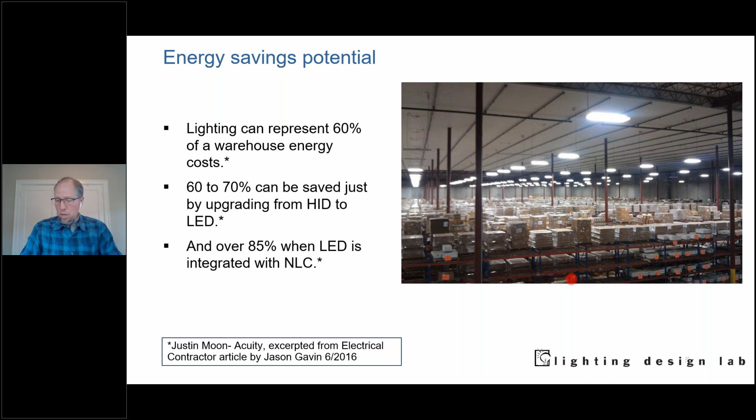So what we'll try to accomplish today is understanding common lighting control strategies. We're not going to spend a lot of time on that. This class is building on some classes that Sean and I think Armando have done on controls. But we're going to review some of the fundamentals of network lighting controls and then review how controls relate to current lighting health and light and health research, touch on that, and then review some applications and look at some products in specific products.

So, you know, people think of warehouses and they think of just big aisles of racking, high racking, or even just low racking, but it's just big storage. And certainly that's a part of it, but warehouses are complex facilities, just like many other facilities. And each of these areas can benefit by controls and can benefit from a tailored lighting approach. So you've got shipping and receiving, certainly the storage, whether it be aisle storage or open storage - those would be handled slightly differently. Loading docks, you've got maintenance areas. Then there's offices - most warehouses have some kind of office. Sometimes they're rather large, sometimes the corporate headquarters is located at one of the major warehouses. Then you've got obviously utility areas like restrooms and showers, and then perhaps customer areas where maybe people come in and are going into boardrooms, meeting rooms, or even just lobbies and talking directly to the staff. So again, complex facilities.

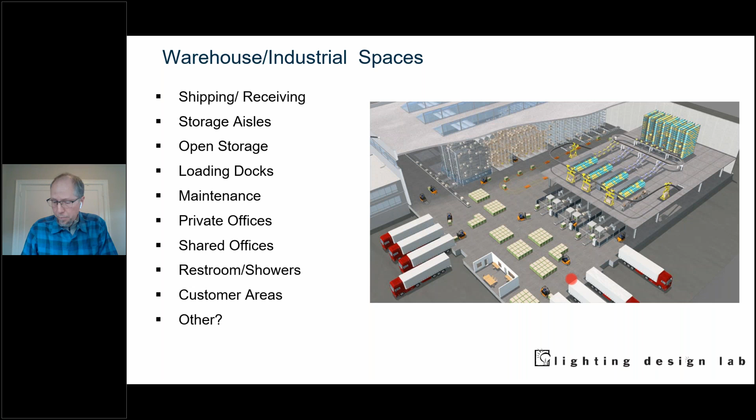This is a controls class, but I think we're going to do a brief overview of some of the high points of what modern warehouse lighting might look like, just to touch on a few things.

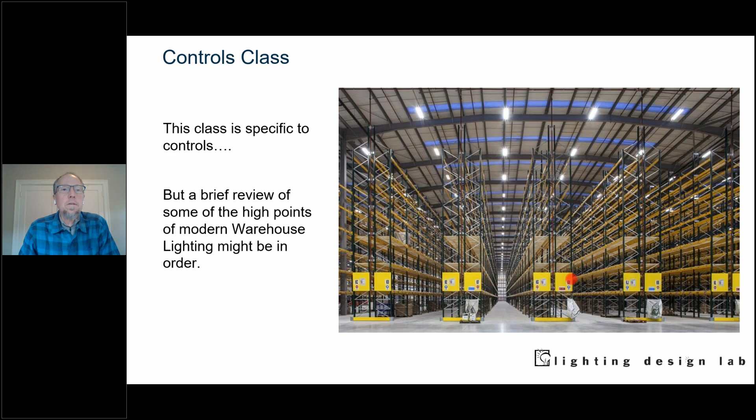Obviously, almost all new construction today lighting is being done with LED. I can think of maybe just a few niche areas where you might use something else, but for the most part, it's LED all the time.

And that's a good thing, especially new LEDs. Modern LEDs are extremely flexible. They really save on maintenance due to their long life. You can do things with LEDs and color that weren't possible before. Of course, they can be a white light source, an excellent white light source, and they're not all the same. We'll look at this a little later.

They can have somewhat poor to excellent color rendering, and you probably don't need the highest quality, highest color rendering for most warehouses, but you also don't want poor color rendering because speed and accuracy are critical to good operation.

LEDs, how they've impacted architecture has been rather profound. The fixtures are smaller and lighter weight. I don't know how many of you have actually picked up an old style high bay metal halide fixture, but they're very heavy. That's not a huge factor, but it does factor into building design and some other things.

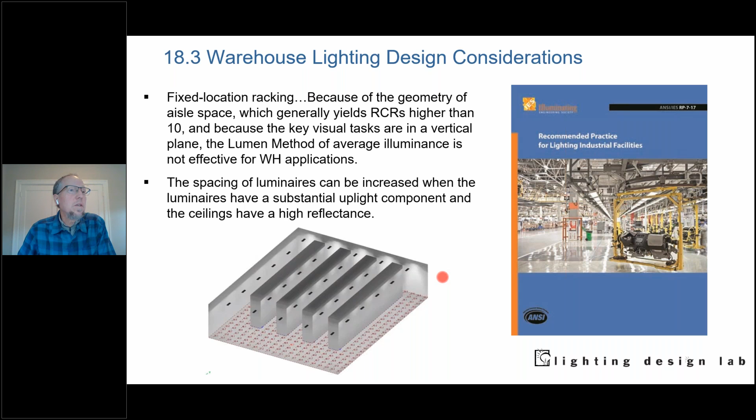You know, how much light do you need? The IES, again, from the IES handbook, they have average maintained foot candles, and they have a range for different things. I just excerpted bulky items, things that related to a warehouse, cold storage, aisles, etc.

This is actually from our website, Lighting Design Lab. We have a little foot candle guide that you might find useful - you can find that in our resources section. But at any rate, so we have the horizontal foot candles, but they also have vertical.

Vertical lighting is critical, particularly in racking areas. That's for reading labels on a vertical surface, like the end of a box or the end of racking. It's particularly important, and not so much horizontal.

So they have ranges and targets, lighting targets for that. These are in foot candles, by the way. So that might be one way to determine how much light you need.

Another, of course, is there's going to be state and local codes that might come into play as far as minimums required.

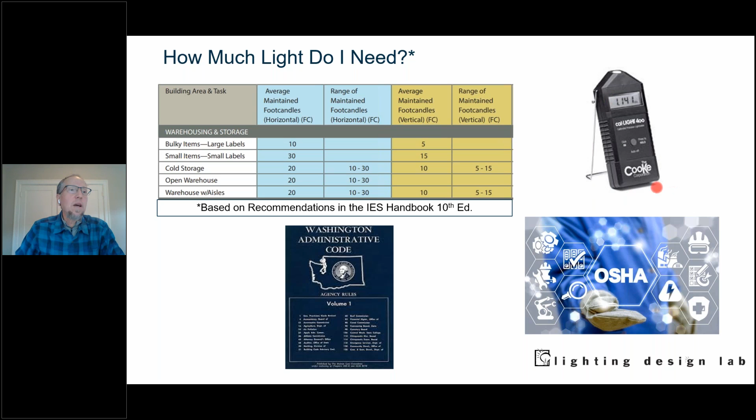Another thing that might be relevant is often an owner will say, well, I know it's a minimum of, say, 20 foot candles, but I want 40. Now that could be a discussion you have. Or they may say, we really like our existing lighting, so when we do this redesign or retrofit of our big facility, we want it to be the same amount of light. So you need to go in there and see how much they've got. It may be low or high, but at least that gives you some reference point for how much they need, or at least want. So having a light meter would be relevant there.

How much light you will get, of course, is a calculation. So you have an idea of what they want or what's required, and how do you get there.

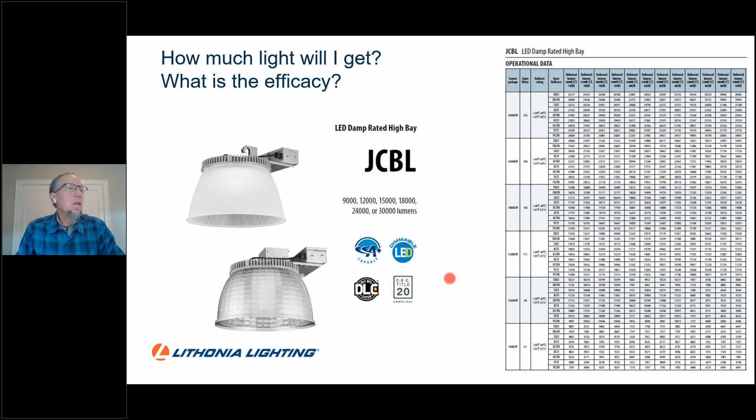Here's a product, a high bay fixture by Lithonia. This one product has many, many variations. So which one do you choose, and how do you know what to pick? I thought it was interesting — you need to be a little careful.

If we were to pick this 30,000 lumen fixture, and go to a 4,000 Kelvin, a fairly neutral, cool color, 70 CRI, we get close to that 30,000 lumens — 29,500 or so.

And the efficacy changes. The 40/70 CRI version is 125 lumens per watt. The 90 CRI product is 80 lumens per watt.

Now, it's possible you need that higher color rendering — maybe you're on some high-speed production line where you're picking things quickly, maybe pharmaceuticals or electronic components, where a mistake is a real, life-threatening problem. In that case, you just have to go with the higher color rendering, knowing your energy savings won't be quite what they could be. That's just the cost of doing business, if you will.

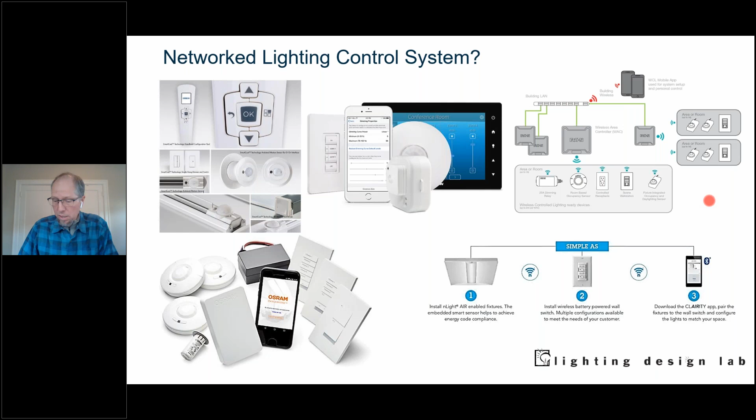Network lighting control systems - it's not just one size fits all. There's so many different possibilities out there, it can be a little overwhelming. One thing we're going to try and do in this class is explain a little bit about some of the systems, but also set your mind at ease to show that there's a lot of commonality between them, but you can choose the one that works best for your situation. We've got some that are fairly simple, some that are much more complex. Generally with the complexity adds more possibilities, more variations. So you just have to decide where you need to be.

Most of these network lighting control systems are going to be a distributed system. That means they're going to have controls in one area, user interfaces, and sensors going into those same zones. So we have Z1 here, we have a user controller at Z1. Those are all going to be connected, whether it be a sensor or a manual user input. They can be a standalone system, or they can be integrated with other types of building systems.

We'll find all of these, even the simplest ones, will be scalable to some degree. They can incorporate some kind of scheduling - time scheduling, date scheduling - though if that's important, you might want to be sure you get one that has more ability there. Again, we'll accept input from various devices and sensors. All are very flexible, and if you want to incorporate it into other building systems, that's something you need to be sure you can do in advance. Most of them will, but there may be workarounds you need to be aware of.

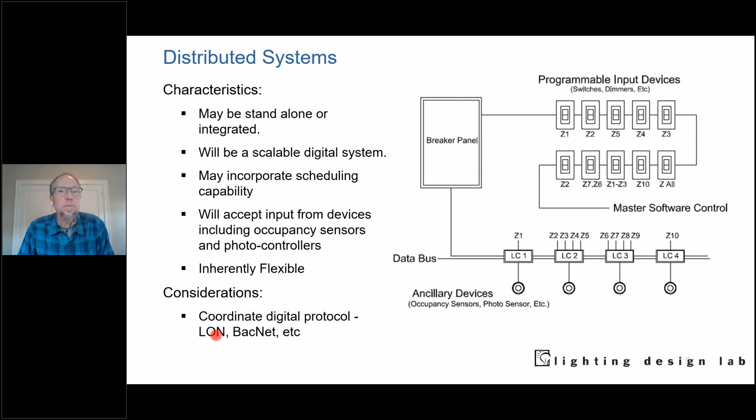Then we see luminaire level lighting controls. So here, if we go back, this is a system where you're putting in components, usually from one manufacturer, but not always. Here, everything's baked right into the fixture for the most part. Then the various input devices, other than the sensors built into the fixtures, there might be wall controllers - those would be part of the same manufacturer's product - and then you're setting it up with usually some kind of handheld device.

They're simple to install and specify - that's one of their big selling factors, if you will. You can get highly granular zoning - we'll talk about zoning a little later on - but in a sense, each fixture is its own zone. Usually capable of occupancy and daylight sensing. Smarter systems, if you will, can do more things - they can have other sensors, maybe CO2 sensors, or other types of things that would be inputs.

We'll look at those. Pretty much all of these will require some level of commissioning. One of the promises of the luminaire level lighting controls is that out of the box you can just kind of put them up, and once you turn it on and set it up, it's ready to go. But to maximize your savings, you're going to want to probably tailor it to some extent.

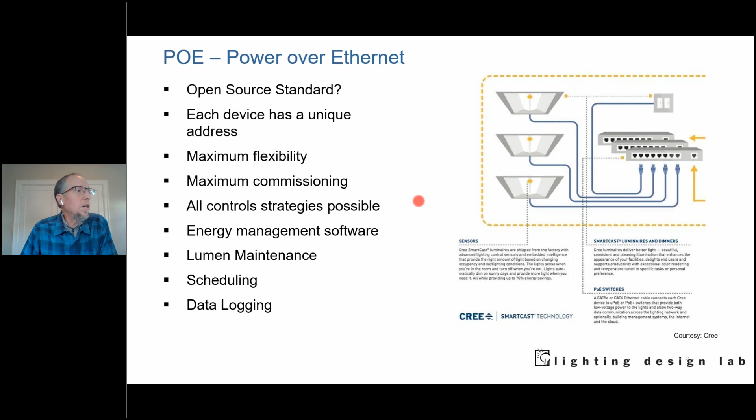So the systems out there today, just to recap and touch on them, are going to be distributed. Wireless is one thing that we're seeing more and more. I think there's often going to be some wired components there, and certainly most of these products can do a fully wired approach if that is what you either need or want.

More complex, more capable, less complicated. So the complexity increases, but often the simplicity is also increasing. Costs are coming way down, and that's been a roadblock over the years. Easier to install and commission, and in general, they're just getting better. So it's really worth taking a look.

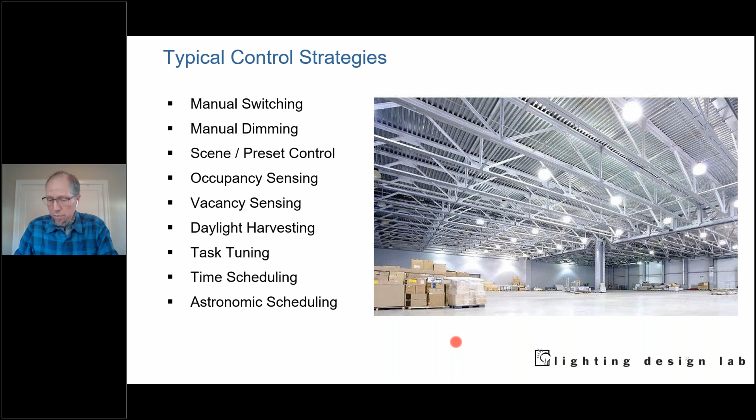So typical control strategies, and some of these are not much of a strategy. One is manual switching, and honestly, in a warehouse, that may be one that you'll still see, where you're coming into a space and you just want to actuate the controls manually. Manual dimming, again possibly, and certainly some of these would apply in office areas, as we'll see. There's a whole range of spaces. Scene and preset control, again probably not quite as important for a warehouse environment. Occupancy sensing, definitely. Vacancy sensing, definitely. Daylight harvesting for sure. Task tuning, we'll touch on that for sure. Time scheduling and astronomical scheduling. Yeah, all of these are relevant. Let's go through some of them briefly, some more briefly than others.

So yeah, line voltage switch, manual switching rather - the oldest types are line voltage, but we see, especially in big facilities, you might be running low voltage actuators to some of the exits and egress points, and then they just turn on big banks of lights. That would be more of an old school approach.

Zones or groups - we may be having areas that are in a zone, small zones. Shipping and receiving would be two different zones, but you might group shipping and receiving into one grouping for certain kinds of things. It's just a range, simple to design, easy to understand, and may not meet codes. We're seeing less and less allowance for manual controls, at least as the main control device.

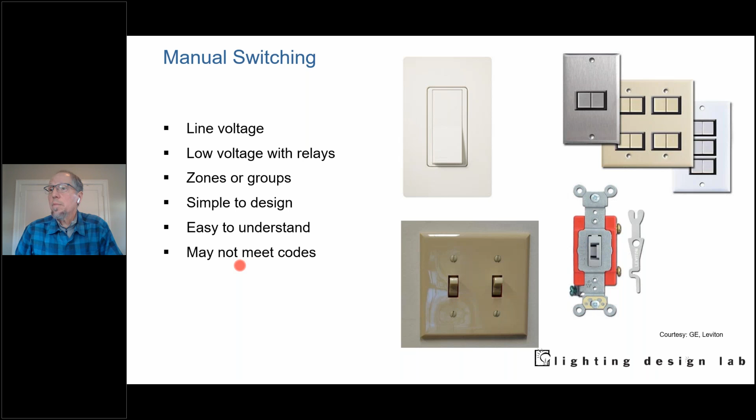Manual dimming certainly has its place in certain types of facilities, maybe a little bit less in a warehouse. The dimming can be line voltage, where dimmers are controlled directly by line voltage, or more likely low voltage remote dimming, where you're controlling a large dimmer located in some other area.

Network systems, again, use zones and groups - simple design, easy to understand. Most people get dimmers, and users do like to have a certain degree of control, which can help for productivity.

Preset scenes are somewhat less seen, though that's not necessarily true. We think of presets and scenes as being something you'd have in a boardroom, but really what we're talking about is zones and groups of zones that all act together for various inputs. You could have a scene that goes from day shift to night shift, and it might be slightly different - maybe at certain times receiving is done but shipping isn't. Or maybe the office is closed, so you can shut off the lights to that section of the building. So some of those could be considered scenes - it's not without some use.

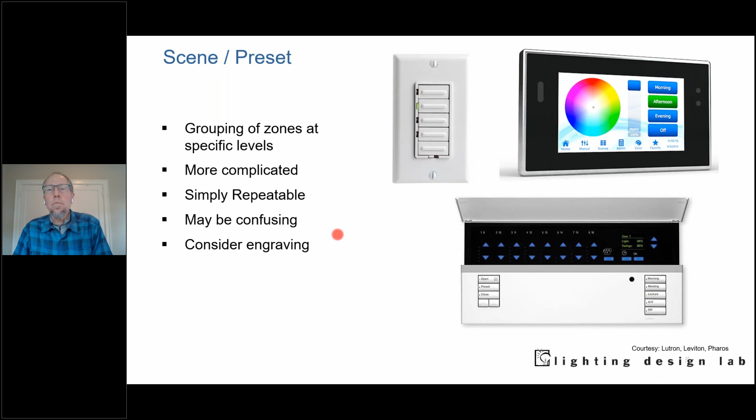All right, so I've included this little video that my colleague Sean put together, a very clever little video to talk about some of these things. I'm going to see if it's going to run for us here. Let's just try it - it worked in all my tests.

Here we go. So we have on-off controls, so we can have all the lights come on manually and then go off manually - that would be your basic switching.

Now we could have manual dimming, where we have one zone that goes even down, dim it back up again, turn it off again - so that would be manual dimming. We can do that with a single zone, or pull them all together as needed, and then of course turn them off. You'll note that all this is being done wirelessly.

Okay, so now we have preset scene control, and so we can dim down. One scene is all up, everything down. Another is certain lights go off, certain zones, and others stay on, and then we can of course turn everything off.

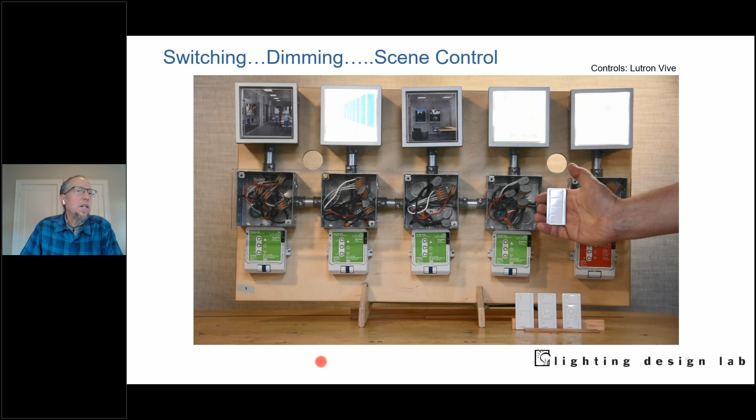This is one system, but other products have a similar effect.

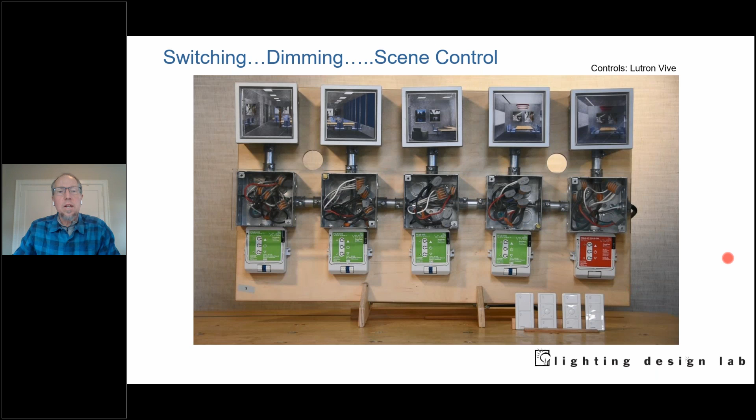I will say that Sean agreed to let me use this slide if I would mention that he's considering a sideline as a hand model, and so he'll be pursuing that later. Okay, that's not true.

So the sensing - some of the input devices. Obviously we've all heard about occupancy sensing, hopefully. That's where you walk into the space and the lights turn on, and then when you leave after a certain period of time - it could be 5 minutes, it could be 30 minutes depending on either what you want or what the code allows - the lights will automatically turn off again.

There may be a little bit of hesitancy for using some of these sensors. Some of the older ones maybe didn't work so well; the new ones are certainly much better. Often the occupancy sensors have been supplanted by the vacancy sensor - we'll touch on that in the next slide.

We would be seeing occupancy sensors primarily in public type spaces - corridors and stairwells, toilet rooms, warehouses, parking garages, and site lighting - places where you don't necessarily want, or it's not practical, to have people actuating the lights.

And I guess now's a good time to say that a vacancy sensor - let's just go to that page - a vacancy sensor looks identical, almost functions identically to an occupancy sensor, except it requires a manual on. So instead of walking into the space and having lights come on automatically, you have to actually turn them on.

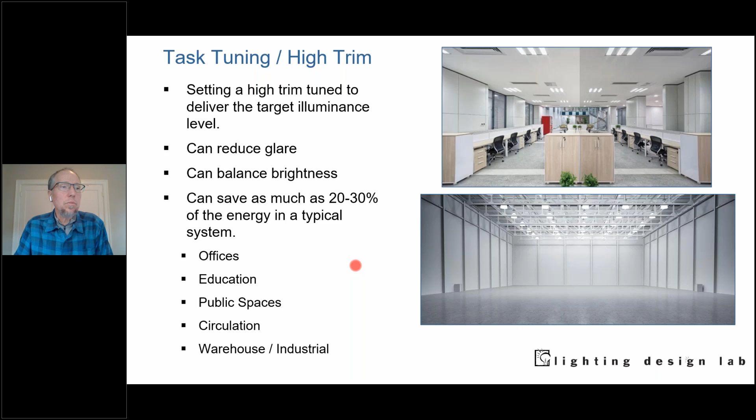Time scheduling—we know all about it—is where you schedule the lights so that, say, the business closes at 6 o'clock, and you want the lights to go off all the way or down considerably by 8 o'clock, or even 7, after most people are gone. Other times you can schedule for when you're closed on Sundays and want to make sure the lights don't come on except for a few safety lights.

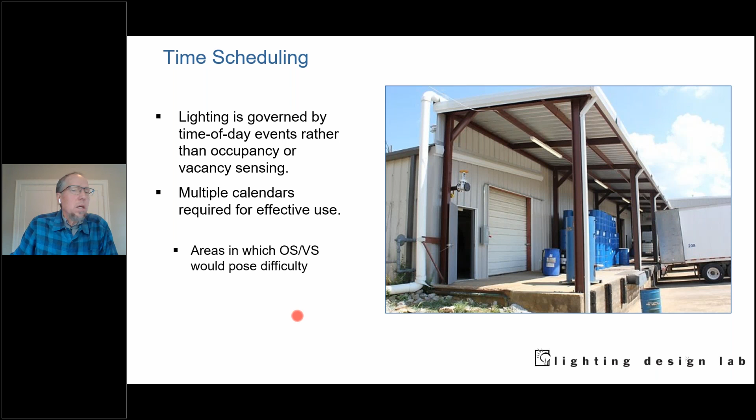Okay, so daylight harvesting, using photocells, using photo controls. A well daylit space is going to maximize your savings, and we'll touch on that a little bit.

There's been this trend, even in grocery stores and warehouses, places where you don't want to dim because it's been costly or not practical, so you just have the fixtures turn off, either in groups or all together.

One of the disadvantages: say your target light level is 30 foot-candles, and you program it so the lights go off when daylight is 2 times our target, 60 foot-candles. That means you'd have 30 foot-candles from the light plus 60 foot-candles of daylight, so you might be as high as 90 foot-candles, and then the lights shut off. Right there, you're going to lose 50% or 30% of your light.

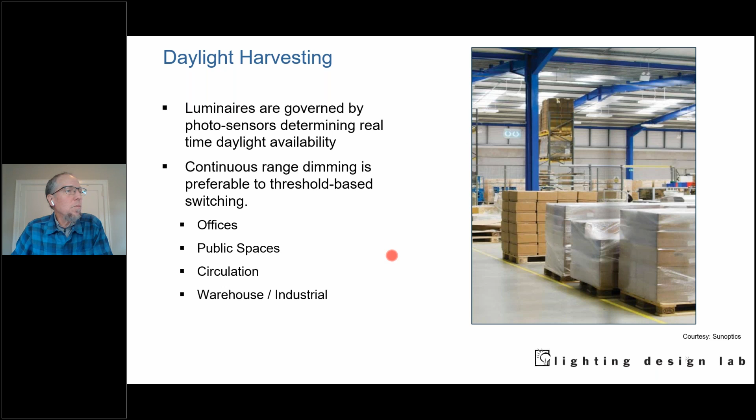Newer control strategies: tunable white, circadian lighting, we'll talk about those. Specific color tune adjustment, so you can either tune to a given color or play with your spectral power distribution. These are really two separate things, but they can affect mood and alertness, and before we had LED lighting, we weren't really able to do this from a practical standpoint.

Maybe after lunch it's even a little longer, places where you can manipulate it to change the mood, change the feel. Maybe different tasks are going on that make it appropriate to change the lighting, the light intensity, and the light color. LEDs are really able to do that.

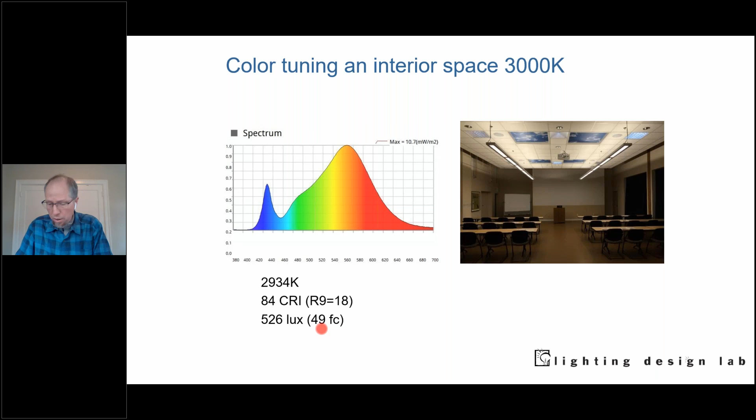But we actually had regular daylight. We had these Solatubes in there, so we could bring daylight into the space. Again, high, almost 100 CRI, color rendering index. It was, in this case, a little bit lower light level, about half the light level.

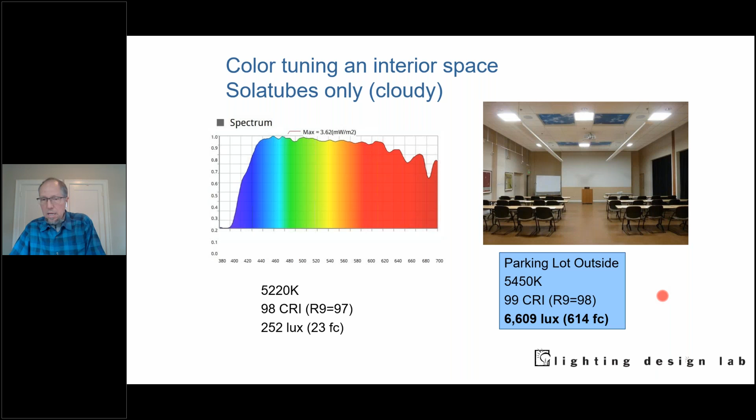And I think the jury's out as to whether we can really get electric lighting to take the place of that. We look at historic factory buildings, and this would be true for schools or even offices. They had tons of daylight, and the reason was because they had to. They didn't have electric light sources that were particularly effective.

I will say back then, in the winter, it was chilly in there, and in the summer it probably got pretty hot. So we really had a connection to the outdoors, for good or for ill.

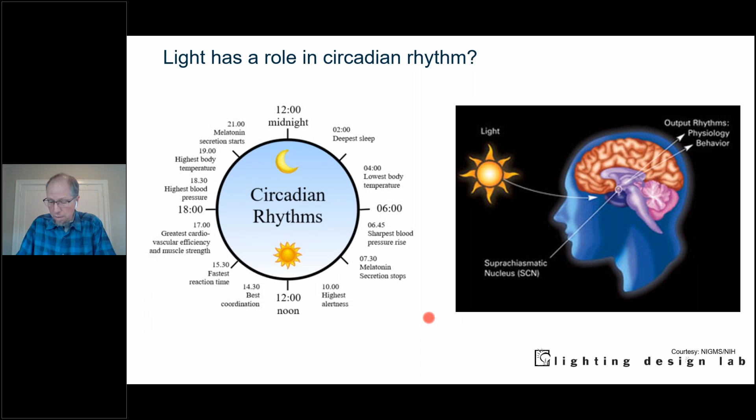Just recently, in this century, in 2002, we identified a new photoreceptor in the human body. It's like we found another finger or some bone hidden someplace that we didn't know about. And it's really not part of our visual system. So we've been doing research, and this photoreceptor doesn't play into our vision, but it does affect the messaging that's going on with our glandular systems and our brain functions. So we're learning about that as time progresses.

One thing we know about this new receptor, it's called the intrinsically photosensitive retinal ganglion cell, the ipRGC. That's a mouthful. It has a slow response, so it takes a little bit of time for it to affect things. It has to do with pupil size, and again, it can affect melatonin levels.

So some of these stimulus variables: we talked about time, we talked about intensity, distribution of the light, the spectral power distribution, and then the duration, as well as the timing.

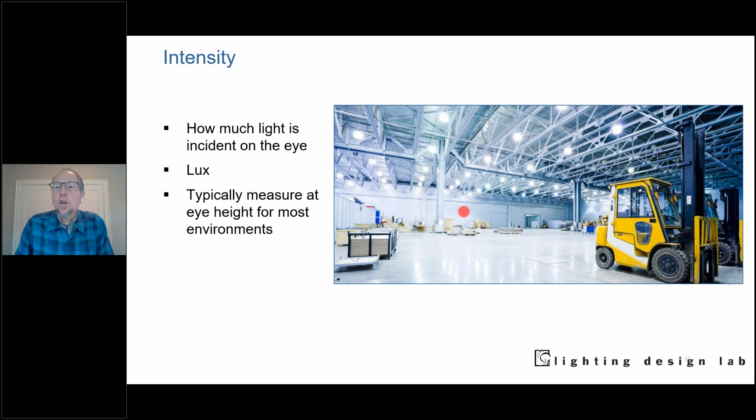The distribution - what direction is the light coming? Is it from overhead or is it from a lower angle? And that may be a function of the geometry of the space, where the fixtures are physically hung, and a whole range of things. Does the space that you're in have a lot of windows, let's say, or are they skylights? The distribution and the direction.

And then, of course, spectral power distribution. So we look at incandescent light sources, and we see lots of red dominant. We look at some of the LEDs, and we see a lot of blue. We look at some of our older, historic fluorescent sources, and we see gaps. We look at daylight, and none of these really look like daylight. So how big a difference does that make? We're really not sure. It may be very important.

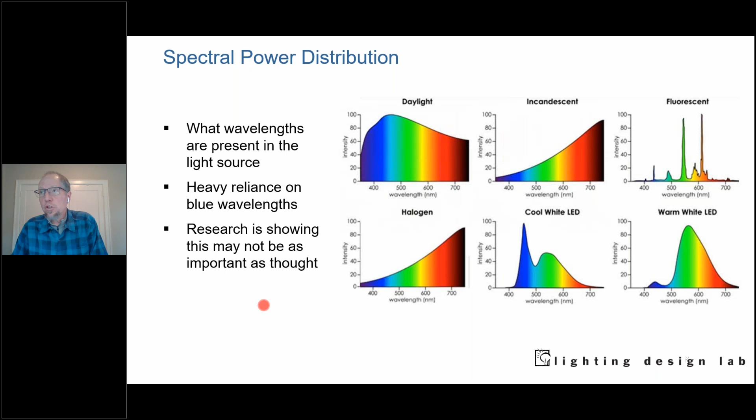There's some people who say lumens are lumens, so it's more about the intensity and the timing. Others are very concerned - is it red light, is it blue light? And then the dose and the duration. So you might be working in a space where it's mostly subdued lighting or some other kind of lighting, and you're only periodically going into the bright area, and then you're going elsewhere. So there's lots of factors here.

And lastly, we look at timing. So when are you subjected to these bright light levels that are maybe blue dominant? After work in the winter, you go to a big box store and you spend an hour there - well, maybe that's not a great plan. Maybe you should have done that during midday and then gone straight home after work. That's not always possible, obviously. So some of these get to be questions about how our society is structured.

Is it fair to have a night shift? In some cases that's not ideal. We're used to our Amazon Prime, where we're getting things within 24 hours. Well, okay, that means somebody's got to be working all night. We see this in healthcare. We're used to going shopping to Target at 9 o'clock at night. So again, we get into structural, societal changes, perhaps.

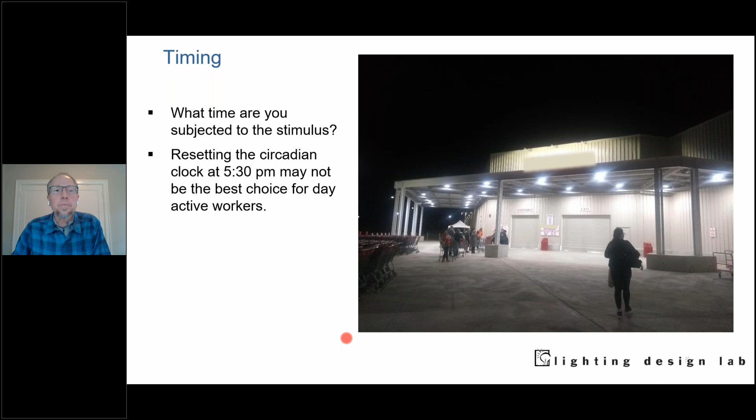So here we have it - the intensity, etc. If only we had a convenient way of manipulating most of these variables, like intensity, spectral power distribution, timing, duration - well, we can do all that with our advanced lighting control strategies. And with LEDs and controls, things are coming together about the same time.

Obviously, there's things that we do know. We're not completely in the dark here. Research is going on. There are things we know that we don't know, and I'm starting to sound like a politician here, but we don't always know what we don't know. So that's the biggest area, I think. Up until this century, we didn't know about the ipRGCs, right? So we're finding out new things.

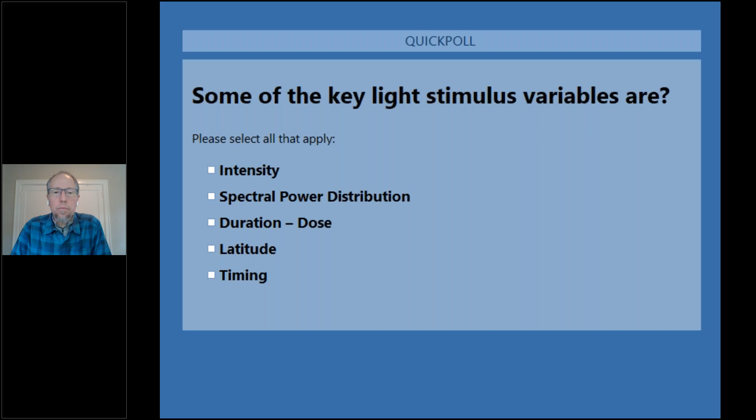I think probably people have had enough time to vote. It's been about a minute, so I'm going to close the poll and share it. There we go. Eric, on your right-hand side in your menu, is there an audience view tab or attendee view? On my control panel? Yeah, because I think you'll be able to see the results if you find that little tab. If not, I will just... yeah, I'm not gonna.

100% voted for intensity. Everybody remember that one. 92%, only 92% clicked spectral power distribution. What? 100% got duration and dose. 17% latitude. And 83% timing.

Well, everybody did good. Latitude was thrown in there just as an X factor, although I could see how you might think that might have to do with whether you're up in Iceland or down in Hawaii. So, right, the variables are... that was the little X factor there.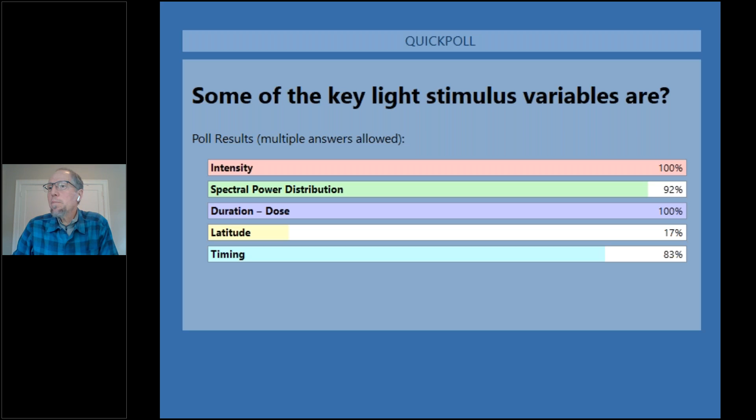I seem to have lost my pointer. I'm gonna try clicking it. Oh, there we go. All right. I'm going to also pick up the pace a little bit. I see we got a lot to cover and we're running out of time. See if I can advance things. Okay, not able to do that. Stand by. Put that over there.

Were you going to save David's question for end of class? Oh yeah, there was a question,

about how to anticipate what the savings will be if there's so many variables. I think probably the best thing you can do, if you have an existing building and you are putting in new lighting and or new controls, so it's a big old retrofit, is to do some data logging, get some data loggers and see what your occupancy rates are. These data loggers can log the amount of daylight coming in. If you have existing skylights, all of those things you can predict, to some degree. It's going to be a little bit of an unknown, but that's probably your best bet. If it's totally a new building, then you just have to go with what the norms are for occupancy, and we'll touch on that actually on one of the later slides. So that's a good question.

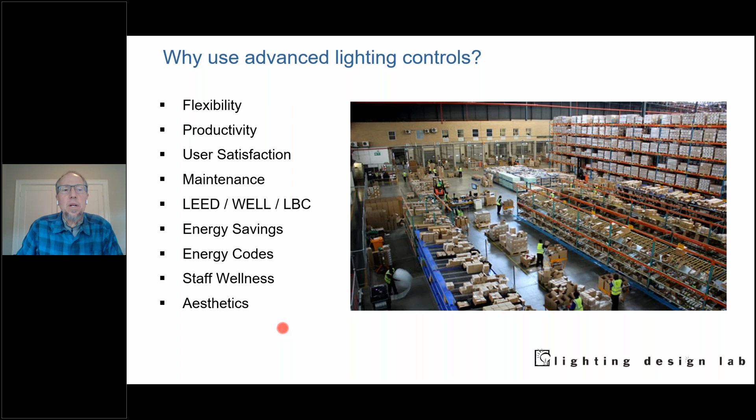All right, so let's look at some scenarios.

Typical warehouse, if we went with regular, last century controls, we would have photocells on the parking area, so the lights would come on at dusk and go off at dawn. We'd probably have one big switch or contactor where when the first guy came in the morning, they'd turn on the lights and they'd stay on all day, maybe until the end of second shift. In the office area, someone would walk in, turn the lights on, and they'd just stay on. Restrooms would probably have occupancy sensors, and the break room might have one too, although not necessarily. And that would be it.

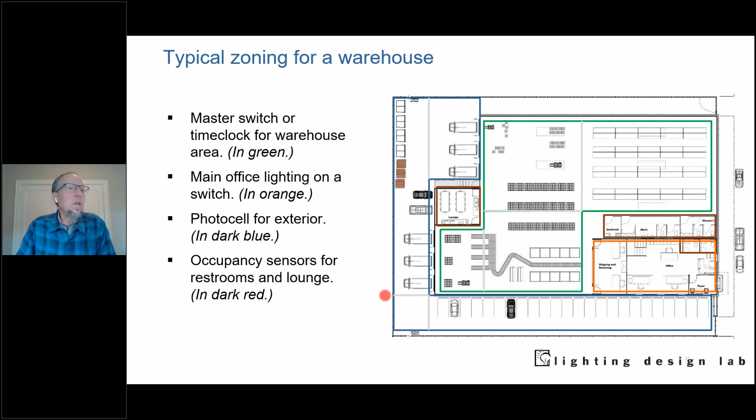Let's look at what we might have in this modern age. Now we've got photo controls in the parking, but we're going to zone them. We've got one zone for shipping, one zone for receiving and some staff parking, and another zone for staff and customer parking. And these would be photo controls.

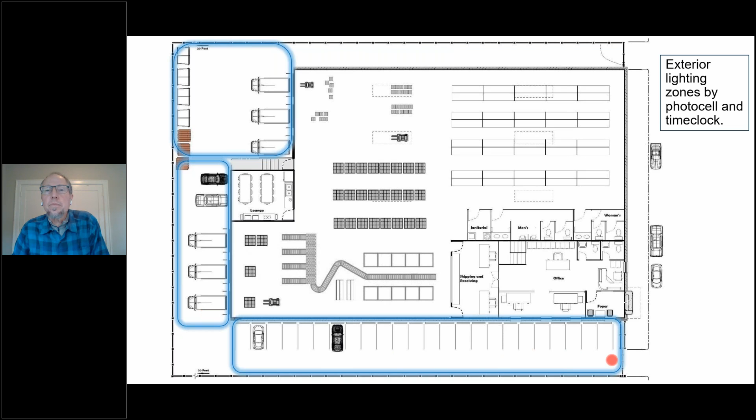Possibly a time clock too, in case. So with our modern approach, they'd be a photocell and a time clock. Then interior, we'd have a photocell in the break room—there are some windows here. Our receiving area would have a photocell, and the office would have a daylight zone going about halfway, a little over halfway, into it.

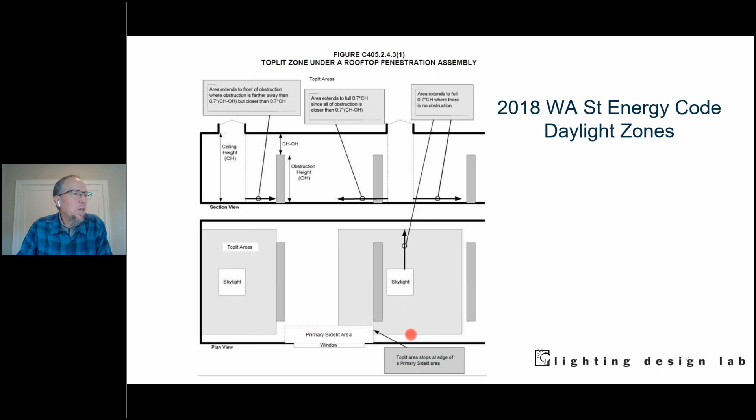But if we look closer, we see there are skylights in this building. In days past, we wouldn't care—they'd just be there, and as the day progressed the daylight would come in, but the regular lights would just stay on. We can't do that these days, and maybe we don't want to. For our skylights, Washington Energy Code says our daylight zone extends about 0.7 times the ceiling height out from the outer edge of the skylight. We'll assume the geometry of the space is such that this whole area becomes one big daylight zone with side lighting and top lighting.

So that's our daylight zone. Now let's look at occupancy zones. Before, all we had was occupancy sensors in the restroom areas and the break room. Now we've got a separate occupancy zone in shipping or receiving, this open area, and each aisle is its own occupancy zone. We've got the office here—shipping and receiving office is one, with some other functionality there—and the office is one occupancy separate from the foyer. Then we also have exterior occupancy zones: one at this little parking lot and one on the customer/employee parking.

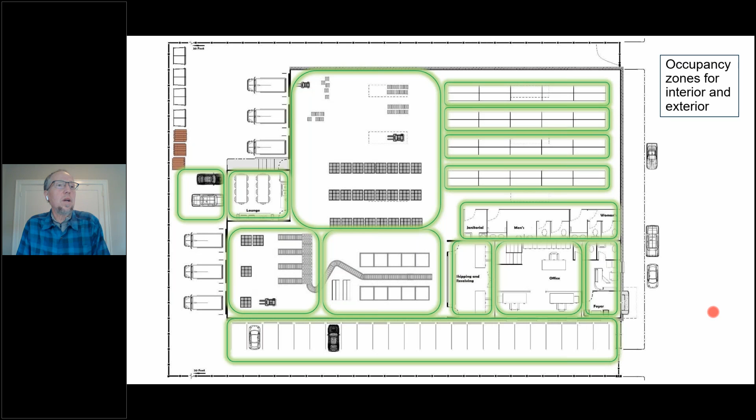A possible sequence of operation might be something like: a minimum of 10% during regular hours for the interior, unless daylight is 3 times the target. The aisles go to 85% upon occupancy for 3 fixtures around the activity—task tuning. The back aisle area goes to 50% upon any aisle activity to mitigate contrast. And egress fixtures go to 110% upon an egress event—whether power failure, fire, earthquake, or whatever—due to lack of contribution.

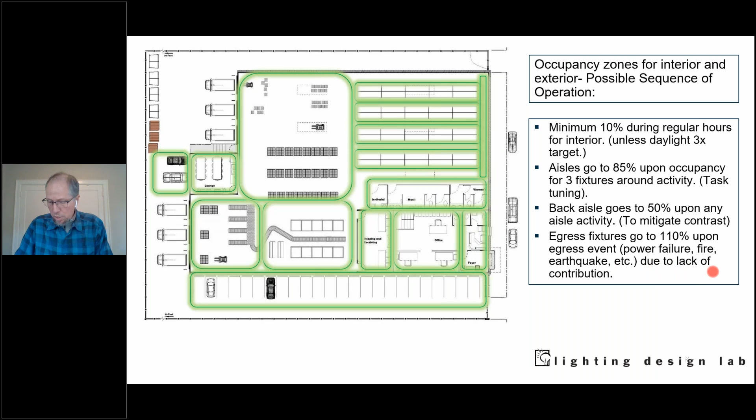What are the egress fixtures? Well, they might be something like this. So we've got egress lighting controls, maybe a little bit in each of the aisles. We want people to linger in the aisles, but not be in the dark, so they can find their way to the exits. Combine all that and it makes for a very complicated and complex control zone pattern.

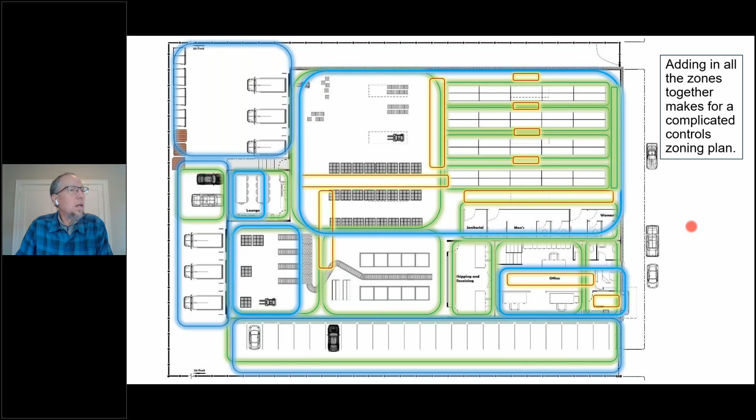But not all is lost—we have network lighting controls to address the issue. So let's go through some products here. We're not going to spend a lot of time, but I wanted to introduce you to some of the players; there are a lot of other ones out there.

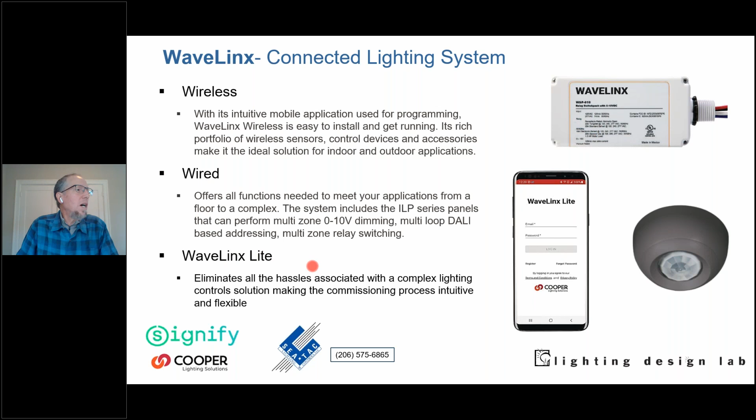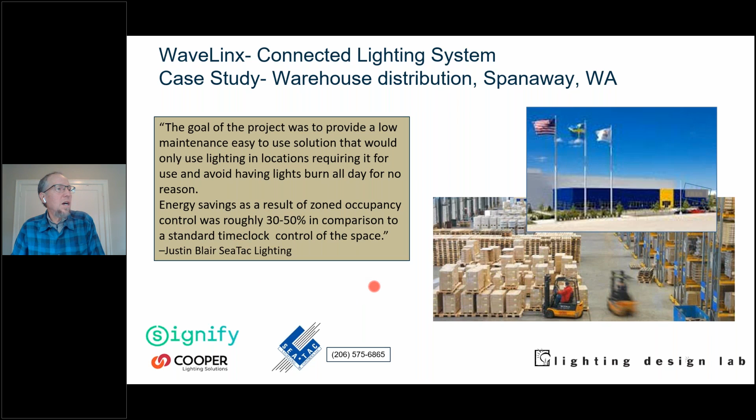They work with, in the Spanaway area, one installation in a fairly large distribution facility. Some of you might recognize those colors. The goal of the project was to provide a low maintenance, easy to use solution that would save quite a bit of energy compared to standard time clock control of the space.

Okay, here's a pop quiz. What are some of the common control strategies? Interior occupancy, vacancy, passive aggressive, daylight harvesting, task tuning, and exterior occupancy.

All right, while people are marking their choices, obviously passive aggressive is not one. I'm just going to give you a hint. Kind of in response to David's question earlier, Eric,

Sean wanted to remind us that the DLC has recently released an updated report characterizing potential energy savings for controls. That might be something people want to take a look at.

David had a follow-up asking if you have a recommendation, or maybe Sean wants to chime in too, on a data logger that can accurately predict daylight. Well, predict daylight or measure daylight? Maybe a little of both. Measure, well, we'd have to measure. David responded, measure, yeah, I mean, Hobo is one that gets used a lot. That's the brand. But maybe, in the interest of time, we'll take that one offline. But if my audio is still on, Hobo is one that gets used a lot. Maybe we can contact myself or Sean later.

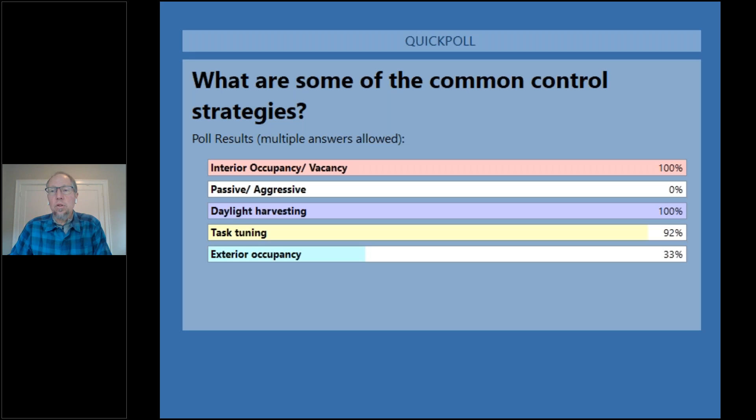So, all right, moving on. Hubbell has a series of products, or in this case, it's their NX distributed intelligence system, repped by Pacific Lighting Systems. Again, we have a wired version, a wireless version, and a hybrid that allows combination of that. It can work with both Android and iOS apps, and that's kind of important. Keep in mind, not all of these little downloadable apps can work across platforms, or even some of them, as we'll see, are only available with certain types. So you may be running around trying to find an iPhone someplace so you can get the thing to work.

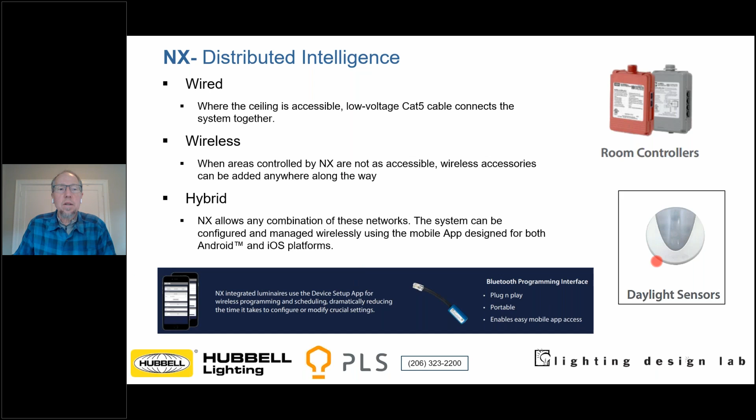They use their DNA, distributed network architecture. I don't know if anybody's seen the movie The Matrix, but yeah, it's happening. No, they use distributed network architecture, so each part of the system always knows what its role is. Apparently, you can do an entire campus without central processors or gateways, although I suspect those are an option if you want to deploy them. Flexible, easy to design with for industrial and outdoor venues.

They have their PEL, by Columbia. Again, a platform with built-in controls, LLLC.

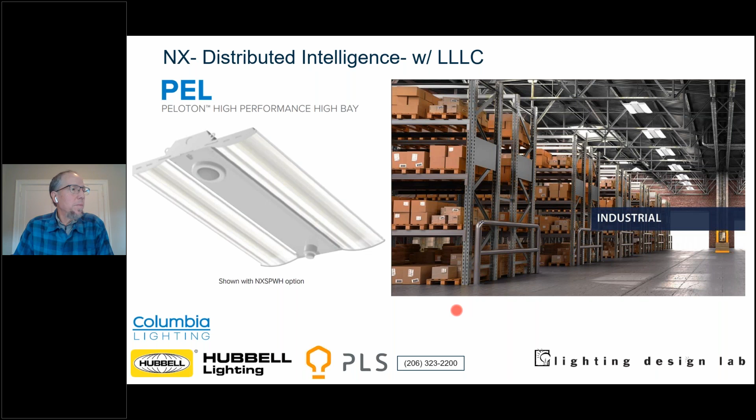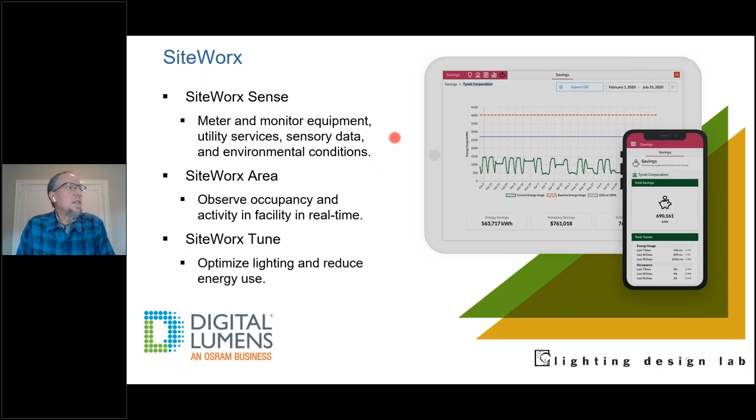Here's one by a company called Digital Lumens. As the name suggests, they do digital fixtures, LED fixtures, so-called. Their SiteWorx platform has SiteWorx Sense, SiteWorx Area, and SiteWorx Tune that have different flavors of monitoring. The SiteWorx Tune uses typical occupancy, various sensor inputs, as well as manual inputs.

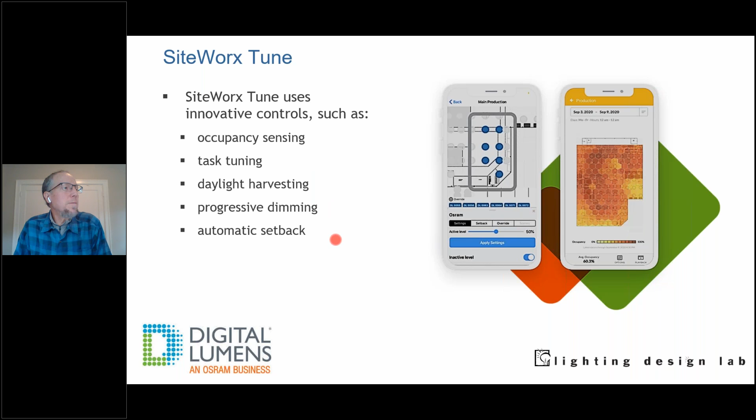The SiteWorx Sense is interesting. You can put sensors into the machinery and detect changes in temperature or vibration that can feed back into the network. You can look at some of your utility usage, local utility, steam, wastewater, etc., and see how things are going, as well as looking at the environmental conditions in the facility beyond just light levels. You could be looking at temperature, humidity, decibel levels to meet health and safety standards. So it's pretty complex there.

And then the SiteWorx Area, you can look at usage over time and see how to configure perhaps your floor plan, track assets, and you can look at people, equipment, and goods and see where they are, when they are. I should say that probably most of these systems that we look at, except for the real basic ones, would have some provision for this kind of thing. It may be a third party that you're working with, or it may be part of a more developed system.

But they just had this on their website, and I thought I'd mention it. They also have their series of luminaires with sensors built right into them as an LLLC product.

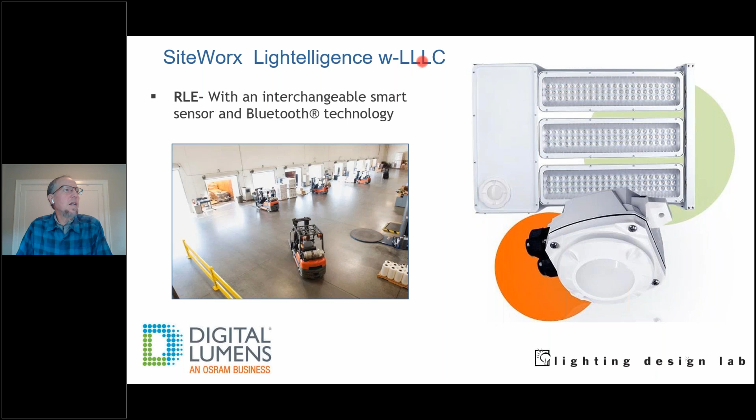Here's one I hadn't heard before, by H.E. Williams, rep by Electrical Reps West. It's their LINKTair wireless controls. You can have a mobile app, it uses iOS only, although you might want to verify that, but that's all they say on the website.

But it'll work with either sensors, fixtures with sensors built into them, or the fixtures themselves would have the radio controls and could talk about their status, and they could also have separate sensing devices.

Here's a situation where you can see a floor plan with the different zones, and you can get them set up at the factory so that you just have to put them up and declare which they are. This would probably be true for the other manufacturers as well.

One thing to check: this product gives coverage up to 40 feet. There were some products I looked at whose sensors couldn't handle these high mounting heights, so that's something you need to check. It may just mean you need to use a third-party sensor rather than the one that you get, but just be aware of that.

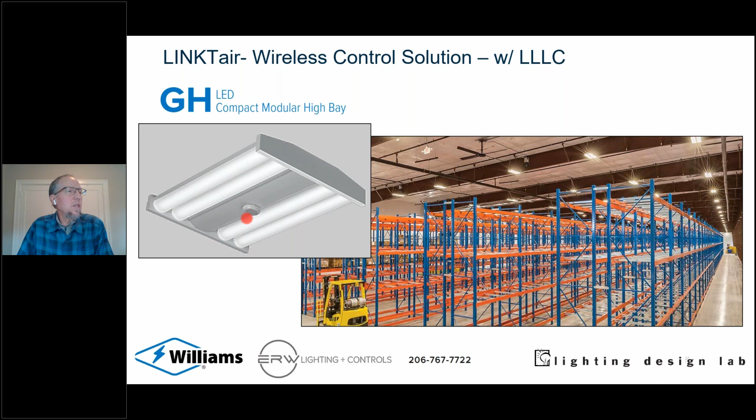And they have their GH product with the sensor built right in. Cree partnered with a company called Synapse to create their Simply Snap on-site controller.

Again, it does a lot of these other things, but one thing I thought was interesting is it has a mesh that can connect up to 1,000 fixtures to a controller up to a mile away. Not sure how big the warehouses are going to be, but they do get large, so distance and quantity of fixtures does become a factor.

I think on a project that we're going to look at in a minute, they had over 3,000 fixtures in their facility, so it adds up.

Again, they've got daylight harvesting, programming and controls, and security is something you'll see most of these manufacturers at least talk about, but it would be worth checking to see how they deploy that security.

Here's a case where they were working with a large manufacturer. You can see on their KBL fixture, they've got the controller right there. And here's a case where they partnered with Uline, and yeah, they had over 3,000 fixtures, almost 1 million square feet of warehousing.

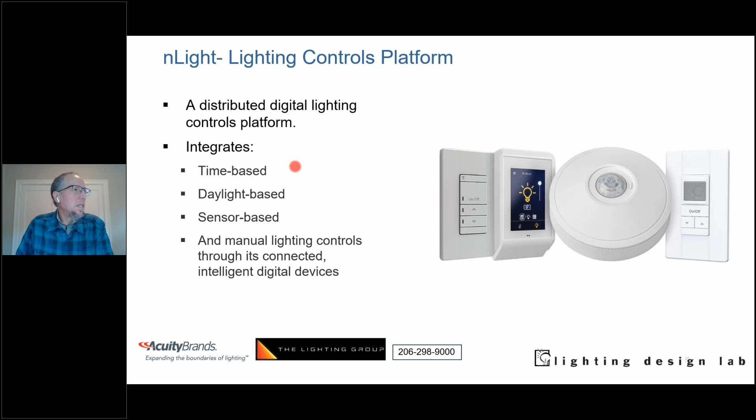And of course, from Acuity, we have nLight. Lighting controls platform is a distributed digital platform, time-based, sensor-based, and manual inputs.

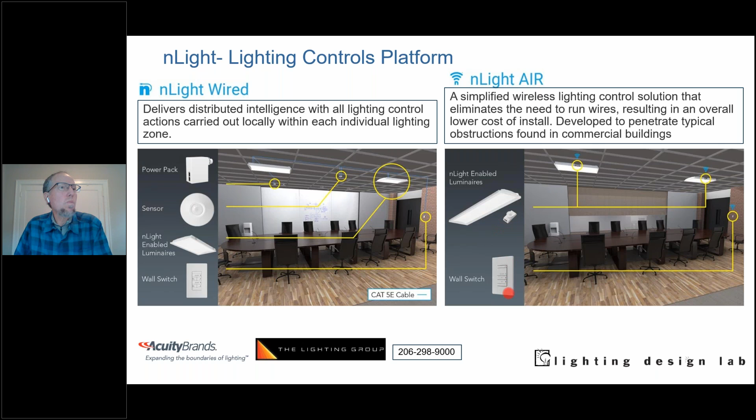Again, this is from obviously a conference room, but you can have wired nLight or nLight AIR wireless controls, different input devices. And it can function in a single space or campus-wide. Most of these products we look at are scalable, it's just a case of how scalable.

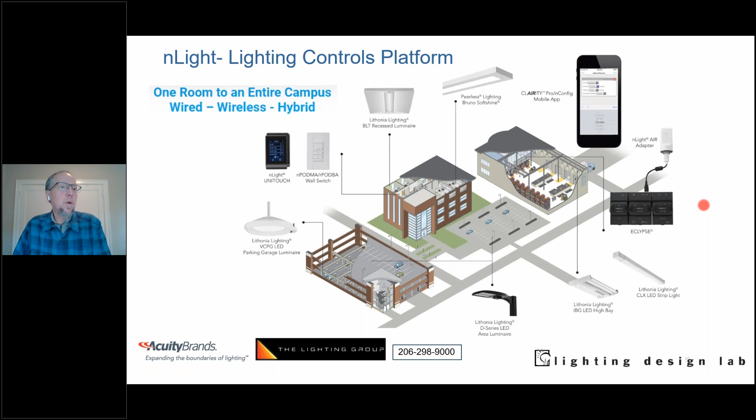Another thing to look at is if you're looking for a campus-wide type of control system, it doesn't hurt to have a manufacturer that has a full suite of products that can accommodate a whole range of spaces, so you're not having to bring in other parties necessarily. And that's repped by the lighting group.

And here, from the nLight series, one of my personal favorites is the high bay, the IBG, or as I like to say, the notorious IBG, and it's coupled with internal controls for a full LLLC platform.

So considerations. One thing we focus on a lot is energy savings, but honestly, you really have to look at ease of operation, ease of maintenance, and ease of installation. If these things don't happen, one, it's not going to work right. And so that'll affect worker productivity, worker safety, worker well-being.

You know, these are bottom line issues that far outshadow any energy savings you might get. This is the owner's primary concern, and this should be your primary concern when you're specifying these products. The savings is great, and that'll happen if you have these things. Can't stress that enough. You know, and all of these even fixtures that LLLC systems that out of the box are supposedly ready to go, they're going to need some kind of commissioning.

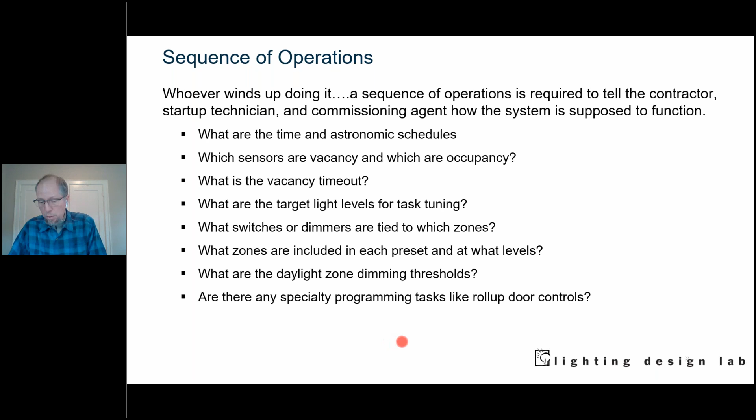Okay, so here's another pop quiz. More important than energy savings, which are the key considerations for a successful control strategy? Ease of operation, ease of maintenance, worker productivity, worker salary, worker safety.

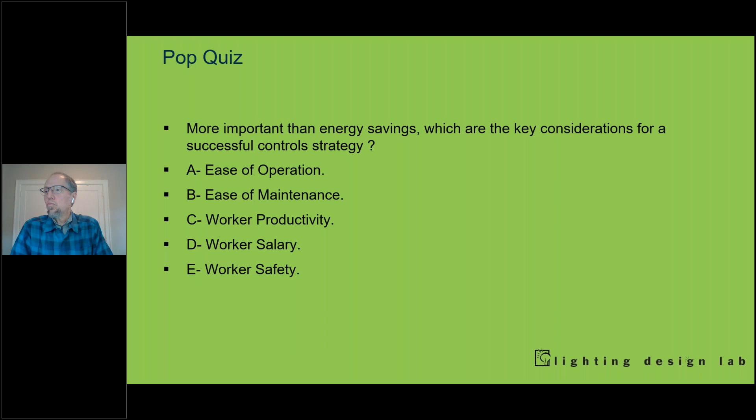Excellent. Thank you, Mr. Dara. And it looks like people have stopped submitting, so I'm going to close the polls. And okay, we've got everybody voted for ease of operation. Yay. Almost everybody chose ease of maintenance. Mm-hmm. And same with worker productivity. Nobody took the bait on worker salary. Hey, that's the most important. And just about everybody chose worker safety too. Excellent. All right. Couldn't fool you. All right. Well, I like it. I like it. All right.

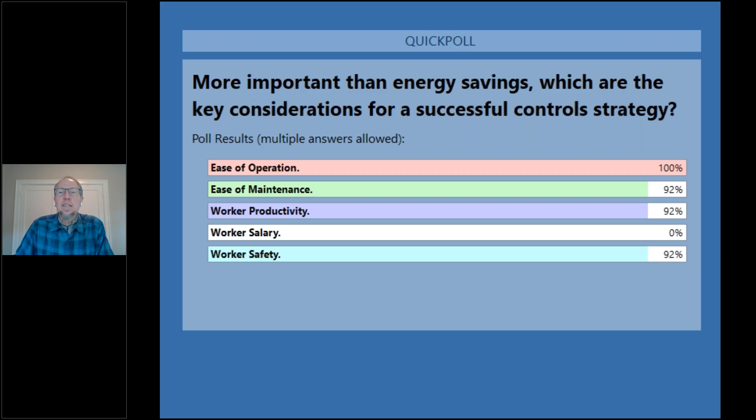So we talked about LLLC, high granularity. So let's look at some traffic patterns in a facility and see what we might be looking at. So let's say it's nighttime. Second shift has gone home. Parking lot is down at 30%, still lit but dim.

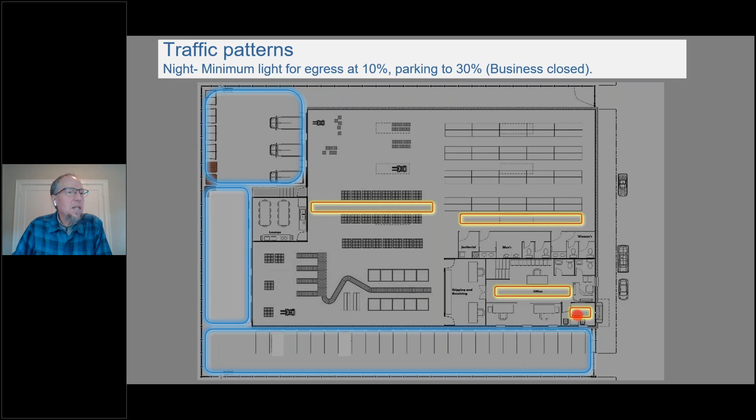Inside, these egress lights are glowing at 10%. They're just sort of barely there. And the business is closed. All right, someone walks in, first guy there, early entry, it's still dark out. The ambient goes up to 30%. The lights, he walks in the parking lot, goes to 90%. He pulls in, and bright lights there. Not here, just here.

And the traffic pattern everywhere this person goes, actually it's a she. She walks in, goes into the lounge, walks over to uses the restroom, and goes. She's the shipping and receiving manager, and so now she's doing some paperwork. Okay.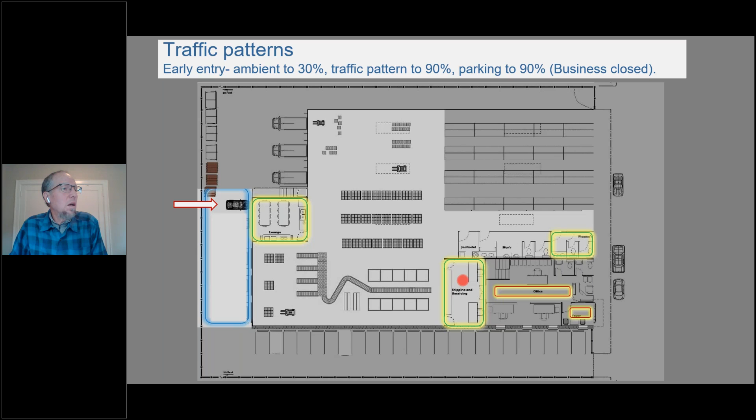And now someone else arrives, and they go in the front door. Now notice the parking lot is down to its 30%, but this one's up to 90%. This whole area is still at 30% ambient. It's just sort of glowing, but not dark. Still bright in here, they're still there. And now this person's come in, they've gone to their cubicle, they went to the bathroom, and those areas are at 90%. The break room lights have gone off, let's say.

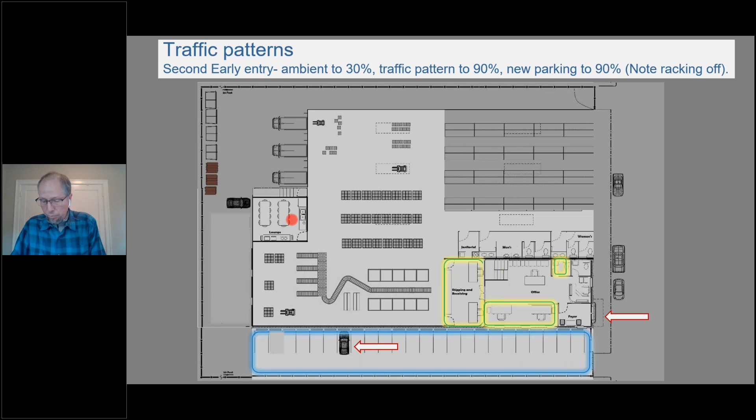That's another scenario. And now it's midday. Earlier it was cloudy, so the skylights weren't active. But now it's midday, so the daylight areas are off. The ambient areas are at 50% where there's no daylight. Occupied areas are at 90%. Someone's still in the bathroom.

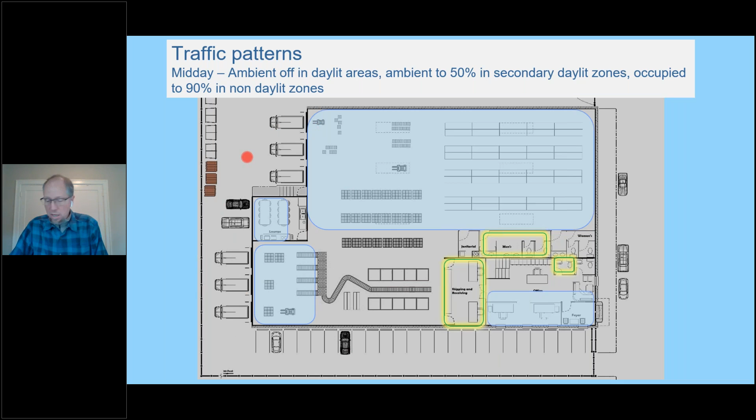Yeah, so there's quite a bit of savings there. You compare that to that scenario we had earlier where just someone coming in and turning on the entire warehouse. The parking lot was lit all night long. This is a pretty different situation.

People sometimes say, geez, these controls are expensive. But, compared to the cost of installing a wired system, where you've got lots of labor, you've got some repairs to do, the cost of the materials might be less, but you look at the overall cost, and it's a different story.

Considerations with wireless systems are, of course, obstructions that you might have. Certain materials, the controls can go right through them. Other materials, it's a lot harder, or it might vary depending on the amount of rebar you've got or different things. So you want to check all those things out.

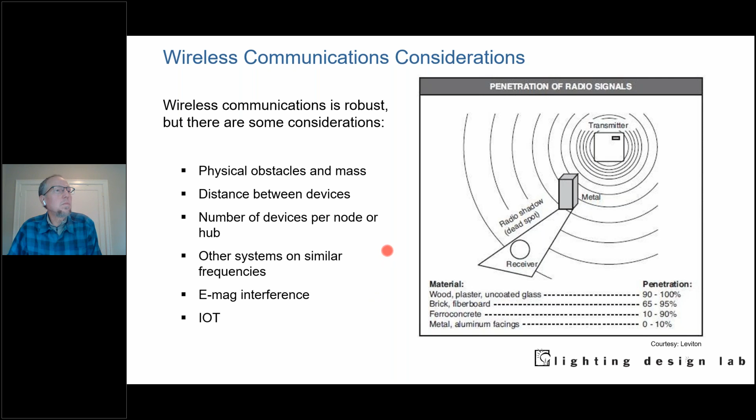Security is a big deal. It's still a big deal. It's going to be a big deal for a while, but the manufacturers are getting smarter about putting in interlocks and things that keep it secure. Sometimes it's a case where you set up the system with one type of product, and then once it's set up, it's a different kind of communication for operations.

Flicker can be a problem in any case, and it can be a big problem sometimes—flicker, or what we call temporary lighting artifacts. It can be okay. Sometimes it's not an issue, sometimes it's kind of annoying but it doesn't really matter because people aren't in the spaces that often. Sometimes it's hugely annoying, other times disastrous. With rotating machinery, it's hard to show a picture of it looking like it's not rotating, but you can have strobing effects that make rotating machinery look stationary. Obviously there's a big potential safety hazard there.

So there's new studies coming out and new requirements on that. You can check it out at this link.

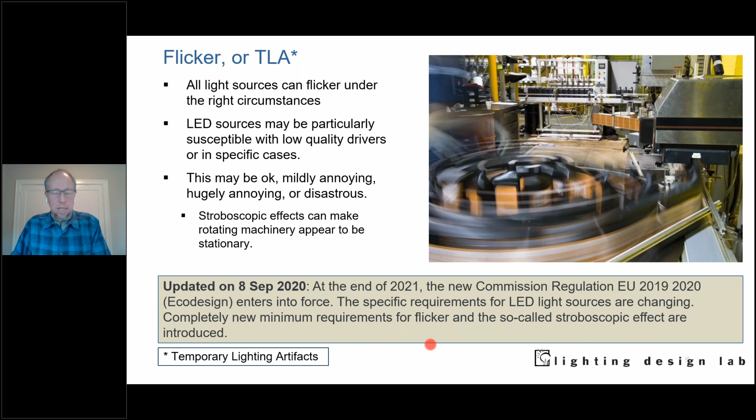Is it flicker, flutter, shimmer, shutter? Different products are going to behave differently. It's a function of how much it's doing it and what the frequency is. As it gets to be a high amount and a relatively low frequency, it becomes more and more of a problem. If it's a low amount and a high frequency, there's not much of an effect.

Where do we go from here? We'll take out our crystal ball and look at things.

So we've got the Internet of Things, whether it be HVAC systems, room scheduling, communications, tracking, security, your refrigerator—what else might be. We're connecting all of these things through the internet, through the cloud, and ultimately it's going to make life easier, but there's going to be some hiccups along the way, and we just need to kind of hang on.

Asset tracking, though, is something that is more and more becoming a factor, and lighting makes a great platform to put these sensors because they can really see into pretty much every space where people are, since there's always lighting there. So you can put trackers on all kinds of equipment and even personnel if you need to know where certain people are for safety or productivity.

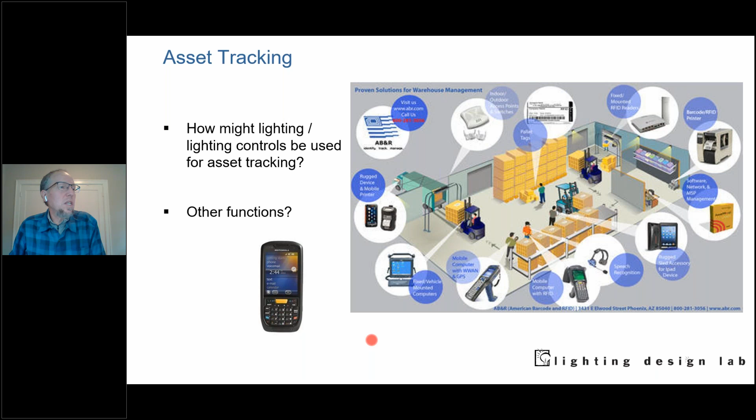Here's a little case study. Signify, used to be called Philips, partnered with Interact—they acquired Interact—and put in a large automotive warehouse asset tracking system. The sensors relay information about warehouse usage and conditions via a Zigbee wireless system, and they can track all kinds of information about the products and how things are flowing.

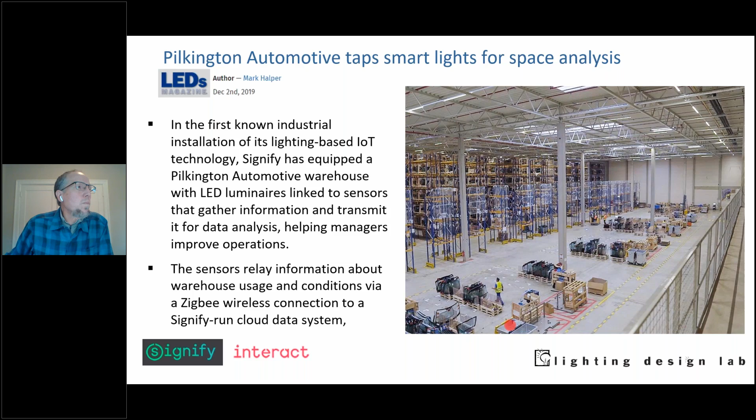Li-Fi, so-called—you've heard of Wi-Fi—well, Li-Fi is light communication. The promise is that our lighting fixtures would transmit this information. It's probably not going to be the case anytime soon that the white light emitters themselves transmit the information. It's probably going to be a separate light source, maybe infrared, embedded in the luminaires that can pick up information or transmit to, say, a laptop or a handheld device.

And in some ways that could be more secure than coming through a Wi-Fi signal. In the case of Li-Fi, it requires line of sight, so that makes it in some ways more secure—if someone can't actually see it, they can't capture it. There's potentially a lot more bandwidth. There's a lot of promise, but it's still early days, and there are some technical problems with the technology.

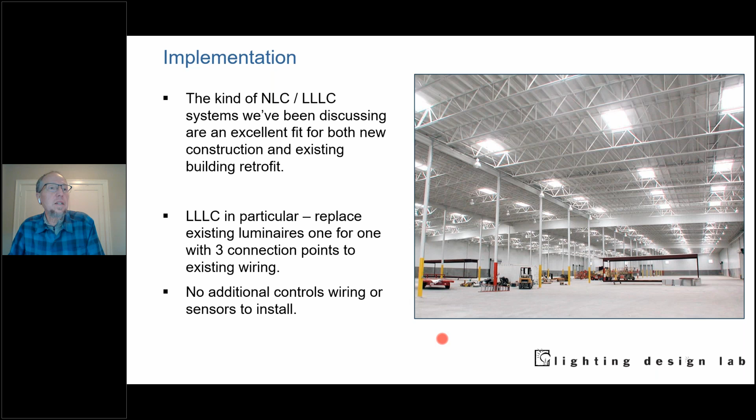The kind of network lighting controls and LLLC systems we've been discussing are an excellent fit for both new construction and existing buildings—no additional wiring or sensors to install. So that's pretty good: you just install the fixtures and it's ready to go. You just have to program it from below.

Okay, I'll just give another second and close because we're running short on time. 1, 2, 3, or maybe 3, 2, 1, close. Okay.

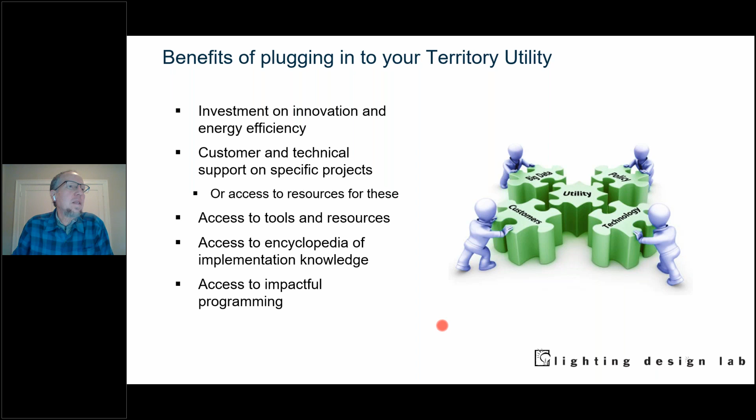So benefits of plugging into utility territory: your utilities want to help you put these controls in. They see the advantage, they see the benefit, and so they want to help you invest. They can provide technical support, tools and resources, access to an encyclopedia of implementation and knowledge, access to impactful programming. One thing I should say that's helpful is if each facility or company has a sort of utility cheerleader, if you will, so they know what the various utilities provide, what they do, who to contact. It doesn't hurt if you've got an advocate in-house.

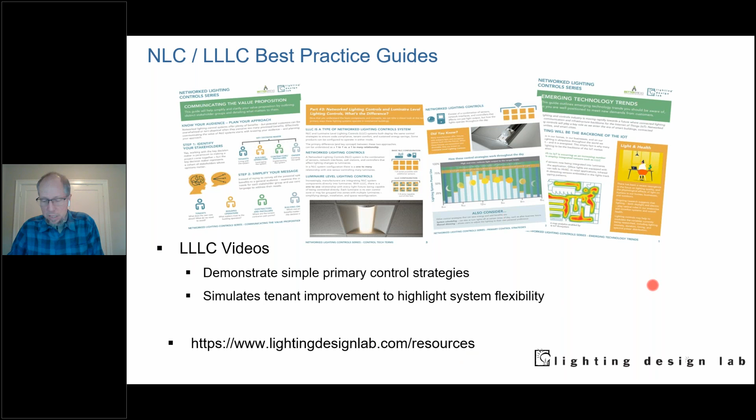So check it out, we've got some guides to help you, NLC and LLLC best practice guides. We've got the video, if you haven't seen it, it's amazing - Armando is like a rock star. And then you can find those on our website. We also have a couple other guides.

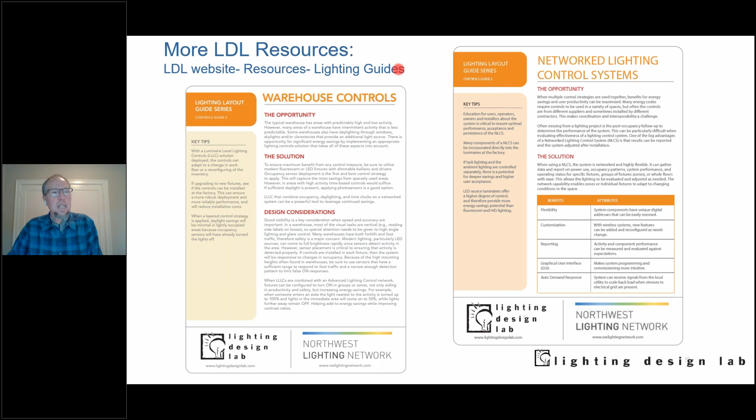Here's a warehouse controls guide, talks about modern controls for warehouses. And here's network lighting control systems. You can find this on our website - go to resources and lighting guides. There's a few other things there as well.

Late breaking news: there was a study recently completed by NEEA. They didn't do the study themselves, they partnered with the University of Oregon. They funded the study, and U of O did it on luminaire level lighting controls versus a regular redesign. It's pretty interesting, not really long, so I recommend you check it out.

Some additional resources that might be useful. And thank you very much. Any of you who might remember my old lab Stella passed away about a year ago, so now we have Olive. Welcome, Olive. Any questions?